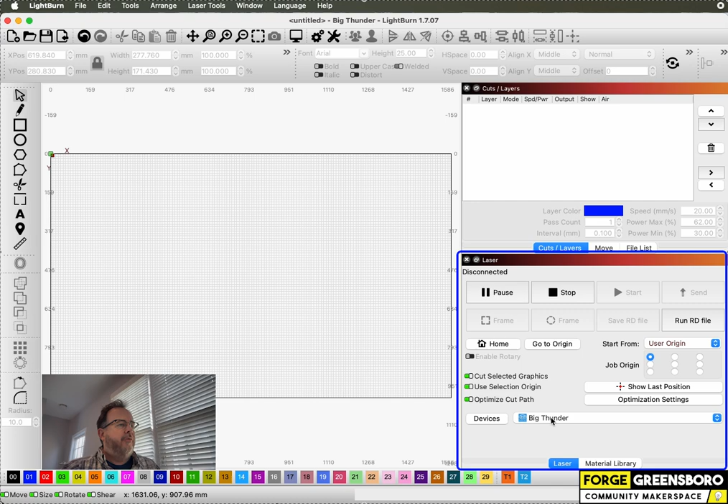Then below that is the laser window. This is where you can send files to the laser. You can set your job origin, tell it how to handle the things that are being sent to the laser, and control which device you are using. Again, there are some tabs that are underneath here. You might have more than just these two. And if you do, don't worry about them for now.

Sometimes people might have accidentally done something like this. Let's see, can I get this to happen? Yeah. So they've got the cuts and layers separated somehow, and they might have moved it down here. You might have things in weird places. If you ever find that, you can always just come back up to the Window drop-down and hit Reset to Default Layout, and then everything should be back where it should be.

So in the software here, we are going to be importing a pixel-based image of the Forge's logo. Then we are going to be drawing an ellipse around it and a circle next to it. It's going to be basically a Forge branded little keychain fob.

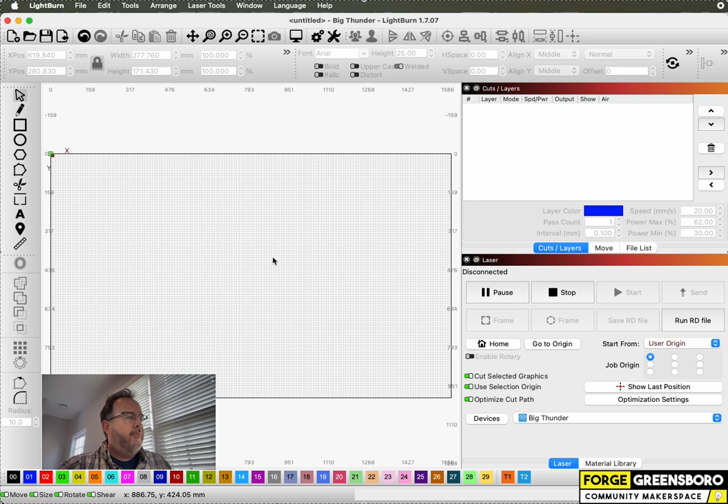So first thing I'm going to do is bring in the image. You can drag and drop it if you want, but right now I'm going to say File, Import. I've got a couple of different Forge logo files here. One's a PNG, one's a JPEG. They will both work just fine. I will bring in the PNG.

Why not? Oh, except one thing that I forgot to do is down here under Devices, I am controlling Big Thunder. Big Thunder is not the laser you're going to be learning to use today. Instead, we are going to be using BlueJ.

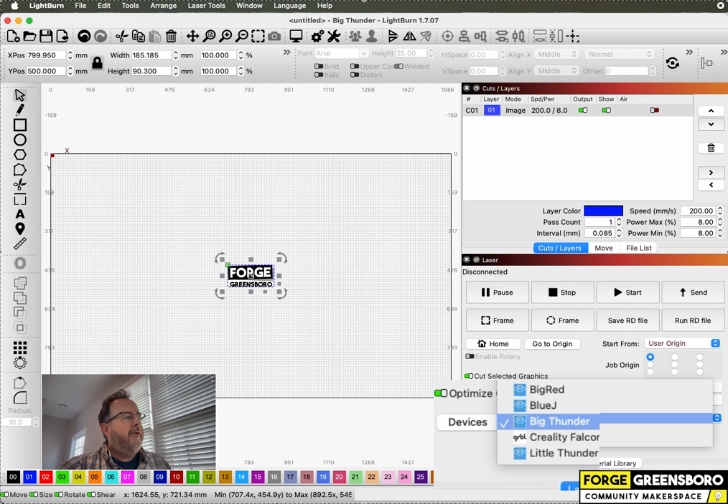It takes a moment because I'm actually recording this from home, not at the Forge. So it's trying to communicate with BlueJ, and it's not being able to communicate. So eventually, it will give up. You'll notice that down below, I have this thing that says no device found.

And you'll also notice this re-rendered over here. The reason for that is that this represents the whole bed of the laser that you're working with. Since Big Thunder is larger, it had a smaller, finer grid on here to represent the further out view you were having to take of the bed. Now, BlueJ is smaller, so we're essentially able to get a little bit more resolution on that.

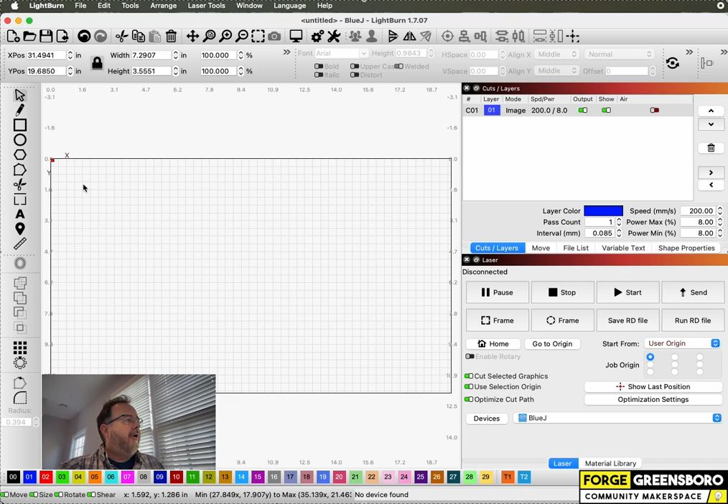Now, where did my Forge logo go? Well, I'm going to zoom out, and you'll see it's way down here. That's because it was placed in the center of Big Thunder's bed, which is way outside the scope of BlueJ's bed. So I'm going to bring this up here. One reason why it's really important to choose the device before you get too far into your job is that different lasers have different home corners.

So at least 2 of our lasers have their home corner at the back left, and at least 2 have their home corner at the back right. So if you are changing from one laser that has one home corner to another laser that has a different home corner, things are going to flip as a mirror image.

But if you also have some text in there—we're not going into text in this video—sometimes that doesn't flip right and it can be kind of a pain. So it's usually a good idea to make sure you get your device chosen before you start importing images or drawing graphics. Right now, this is over 7 inches by about 3.5 inches.

So that is way too big for a keychain fob, unless you are working for a gas station on the interstate where people keep borrowing the bathroom key and you want to make sure they don't walk off with it. In that case, you might want a 7 by 3.5 inch keychain fob. I'm not going to be doing that today.

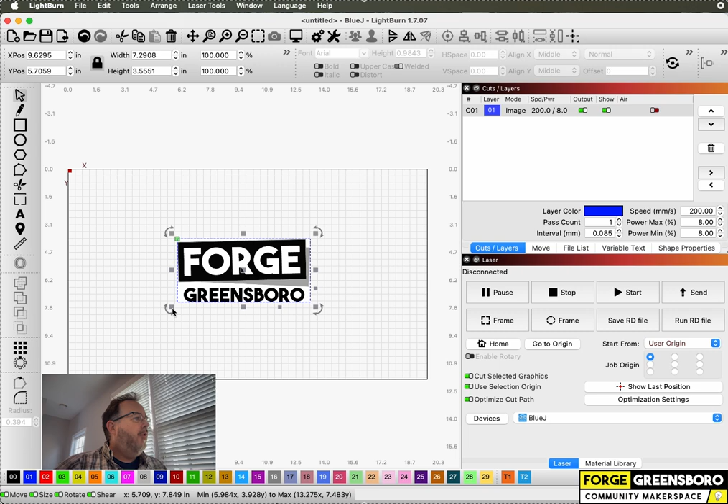So I want to resize this. There are numerous ways we could do that. If you mouse over one of these corner control squares and hold your mouse button down, it will allow you to zoom this thing in or out. Let me zoom in here a little bit.

Notice that if I come out here over the little round arrows, it gives me a little round arrow when I mouse over it, saying that if I held my mouse button down and did something, it would rotate the thing, which is not what I want.

I'm going to undo. If you mouse over these little corner handles, it's supposed to give you a diagonal arrow instead of your cursor, but it doesn't seem to be doing it right now on mine. You should get a little diagonal arrow pointing this direction or that, and when you get that, you'll know you can resize this.

You'll notice it will not change the proportions as I do this. If I hold down my Shift key, it will allow me to change those proportions. That's the opposite of how these things work in some software, and actually the opposite of how it works in some other contexts here. So I can bring this in this way to make it smaller.

I can also do that with the width and height inputs over here. You'll notice this padlock is currently locked, which means that if I change my width or height numerically, the other one will change proportionally. So if I set this to, say, 2 inches wide, it then changes the height to just under 1 inch.

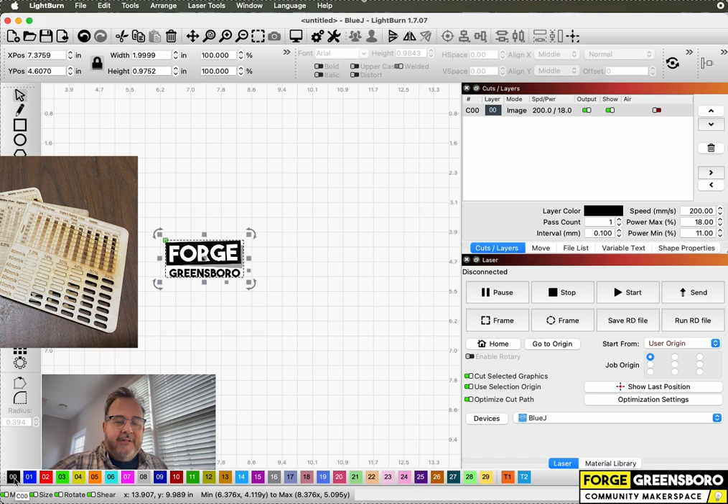You're not going to use all 30 in most cases, unless you're creating one of those test cards I have sitting around the shop. Usually you're going to use no more than 1 to maybe 5 of them, usually more like 1 or 2. So I am going to set this to layer 00.

You'll see layer 00 has a speed and power associated with it. That speed and power was set by the previous person to use this layer for an image on this computer, so your numbers may be looking very different here as you go through this.

I'm then going to deselect my shape. I did that by selecting my selection tool and clicking outside here somewhere. Zoom in a little bit more. I'm then going to choose my 01 layer and draw my circles and ovals on that layer. So, selected 01, I have my ellipse tool selected, and then I'm going to draw out an oval.

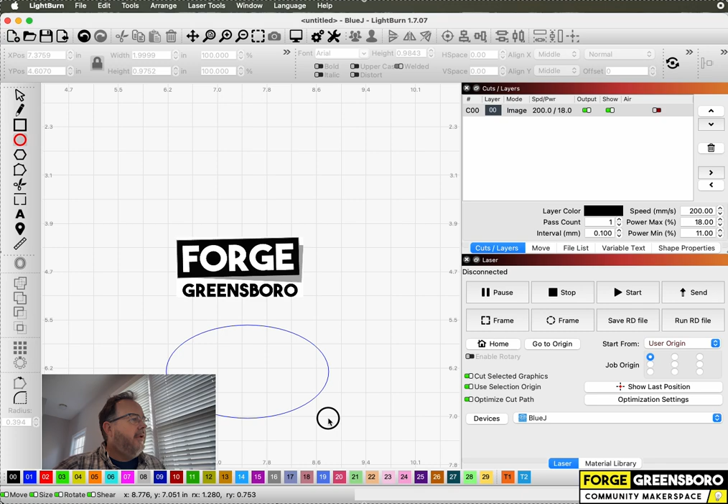Okay, I'm going to grab my selection tool. When you mouse over the center of either your image or your oval graphic here, you should get a little 4-directional arrow that shows up. But if I grab this by that center control handle, you'll notice that just moves the shape around. Because of the snap settings we have here, you'll notice this wants to snap to the center of that. I could also select everything and use this align both vertical and horizontal centers tool.

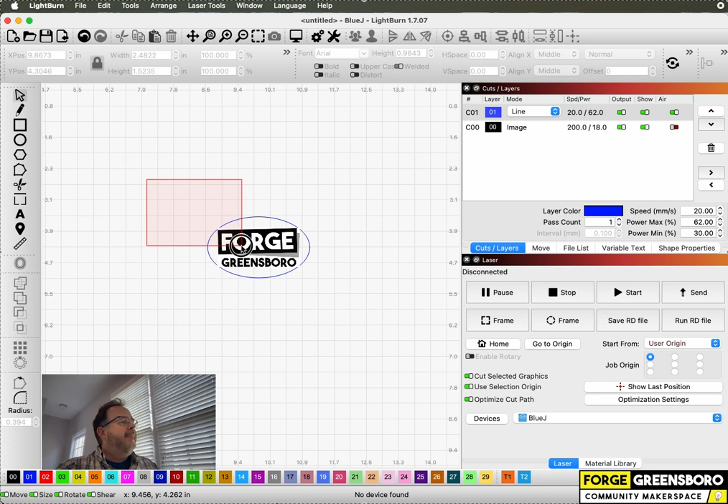When I selected these things, you'll notice, as long as you don't have red-green color blindness, which more people do than folks realize, if I drag right to left, this thing turns green. If I bring it to just right here, where it's just overlapping the corners of those two shapes, it still selects everything. If I go left to right, you'll see that this box is red. If I come right over the corner of these things, nothing is selected. But if I surround them entirely, they are selected.

This can be useful if you've got a design with a lot of little parts arranged on your bed, and you need to more easily select these but not those. This difference can be helpful. The mnemonic device I use for this is: green is greedy. So this oval looks a little small for what I want it to do here.

I'm going to unlock the width and height proportions, since they don't really need to be proportional to each other necessarily. I'm going to make this 2.75 inches, let's say. Oops, be better if I could type 7.5. There we are. And maybe 1.75 inches tall. That looks good to me.

Then I'm going to grab my ellipse tool again, so now I'm going to draw the little keychain hole that the ring will go through. I'm going to hold down my shift key this time while I draw out a circle. If I hold down shift, you'll notice it will not do an oval, it will only do a circle. If I release shift, it allows you to get an oval. Hold down shift again - and that is somewhat different from what it does for an image, so I just wanted to point that out to you.

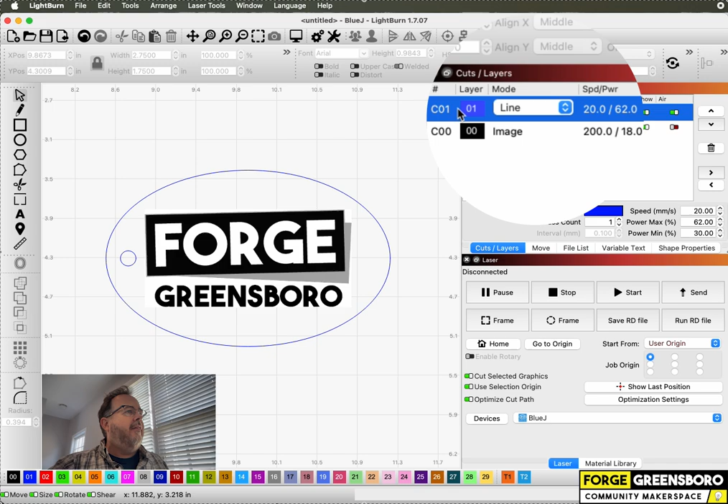And you want to make sure that everything that's supposed to be on that shape or inside that shape is engraved or cut first so that it will still be in focus and in the right location. So right now, my line layer is set to be executed before my image layer. So I'm going to select that image layer and hit this little up button on the right, and that will move it into position.

So here in the Cuts Layers window, we've got the name of the layer. Now that is set by users, and since you're working on a public computer, you have no idea what the maniac before you is doing. So ignore whatever it says here in this first column, if it says like 'cut 3mm Baltic birch' or something - somebody named it that at one point, and it doesn't necessarily have those settings set on it anymore. By default, it would say C00, C01, C02, etc.

The actual layer number is listed right here along with its color. What is the image mode? For pixel-based images, it's just image—there's nothing else you can do with it. For vector layers, you can have line, fill, or much more rarely, offset fill. Usually it's one of these two.

We are using a line. Then it has what speed and power has been set for that particular layer.

We then have output—that is, is this set of instructions going to actually be sent to the laser? There are situations where you don't want it to be. We're not going to be going into any of those today.

Show is just, can I see it over here? People usually don't turn that off, but if they have, pay attention.

And then air, that only is relevant for the Thunder lasers that we have at the moment. That might change with other lasers we get or whatnot, but you can ignore those for now.

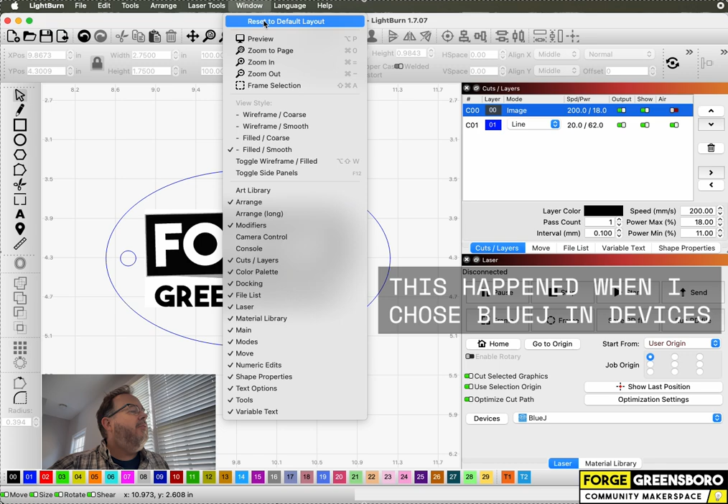Apparently I've got more tabs showing up down here. Let me go back and reset to default layout. There we are. Okay, let's double click on our image layer here.

I'm just going to double click on this little black chip that says 00, and it opens up our cut settings editor.

So I had already set this up before we got in here to a speed of 200 and a max power of 18, which is probably not bad settings for an image layer, although we've got those little test cards that are usually around the department that will give you an idea of what speed and power combinations will do.

Minimum power for an image layer is really irrelevant. I actually kind of wish they would disable that for image layers, but they didn't. Essentially, minimum power is what it does when the laser can't move the speed you told it to move. And for an image, all of the area where it's moving too slowly is going to be outside of the image. We don't need to go into that more than that.

Settings you need to make sure you check, because you're at a public computer, and again, you have no idea what the person before you was doing.

We've got negative image. That's one that people will sometimes turn on if they are engraving a photographic type image on stone or glass or acrylic, because in those cases, where the laser hits, it turns it frosty rather than turning it dark and burnt. So if you are trying to engrave photographic type images, you don't want it to look all ghostly and weird, and so you would turn it to negative. The person before you may have turned it to negative and you might not be expecting that. Always check that.

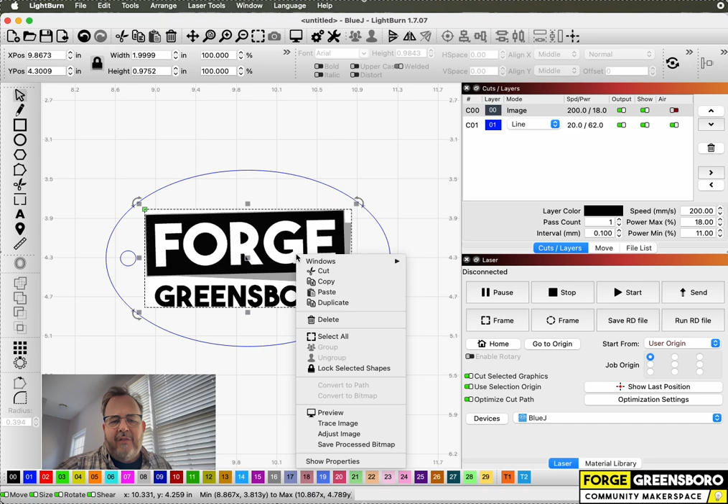All right, I'm going to close this. If I want to modify how this image is handled, I can go back and forth between the cut settings editor and the preview button, but there's a more direct way. If you left click your image and then right click it, oddly enough, in certain situations in this software, simply right clicking doesn't do it—you have to left click, then right click. It's a little weird. So I'm going to come down to adjust image, and get this adjust image window.

You can see down in the bottom left area we have layer settings, and image mode is set to threshold, as we saw earlier. I'm going to resize this so we can see it better.

So for image mode, threshold is what it's currently set to, and you see what it's going to do. I'm going to run you through these very quickly—I'll probably do another video later that goes into these in more detail. Ordered will give you grayscale, but it will look like a 1990 Macintosh. I have memories of playing Risk on a friend's 1990 Macintosh my freshman year of college.

Atkinson will have a scatter of pixels—they're scattered around a little more randomly. Atkinson is a little bit more high contrast than the next three, which are all very similar. We've got Dither, which is generally considered the industry standard. You can come down and do Stucki, which is very similar, and Jarvis, which is very similar. Dither, Stucki, and Jarvis basically do the same thing, just using different algorithms.

In all of them, they scatter single pixels of all the same size at different distances from each other to create different levels of black, white, and gray. Newsprint and halftone instead have a scattering of pixels that are the same distance from each other, but they are larger or smaller.

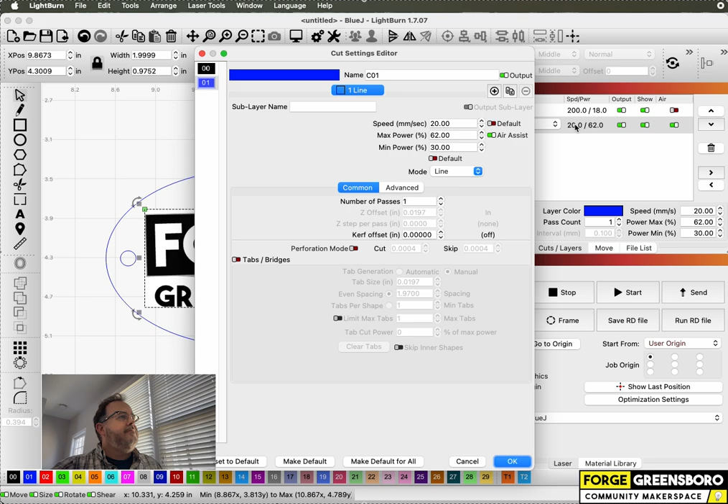For the line, I'm going to double click it in the cuts and layers window. Right here I have a speed and a max power set to good values for BlueJ here, so we'll be moving the laser head when it's cutting at 20 millimeters per second. You can use line layers to just score things, just go ahead and draw things. The speed and power you use determines whether it's going to be cutting or drawing—this is a good cutting speed.

62% power is the max we're allowed to use on BlueJ. This gives you the maximum amount of power you can safely get from the tube, but the power supply can supply more power than the tube can take. So we're saying, hey power supply, give me 62% of your power, which is the most the laser can take. There should be some controls that keep you from going over max power, but we're asking to go at 62 and not higher. If you go from 62 to 75 to 80 to 90, you're getting no difference. It should still be 62.

The minimum power I'm setting to 30. Minimum power is what happens when the laser can't move the speed that you told it to move while firing. So if you have sharp corners or very tight curves, it probably won't be able to get above a certain minimum speed as it navigates those things.

Our mode is set to line. Fill and offset fill are your two others. Usually line and fill are the only ones we use, but if you're cutting or drawing, you want to use line. Down below, in terms of settings some people set that you may not be expecting, there's number of passes.

Usually I like to go one pass and just go high enough power and slow enough speed to do my cut on one pass. Some people prefer going a lower power at maybe a faster speed and running it multiple times, so someone may have number of passes turned on higher.

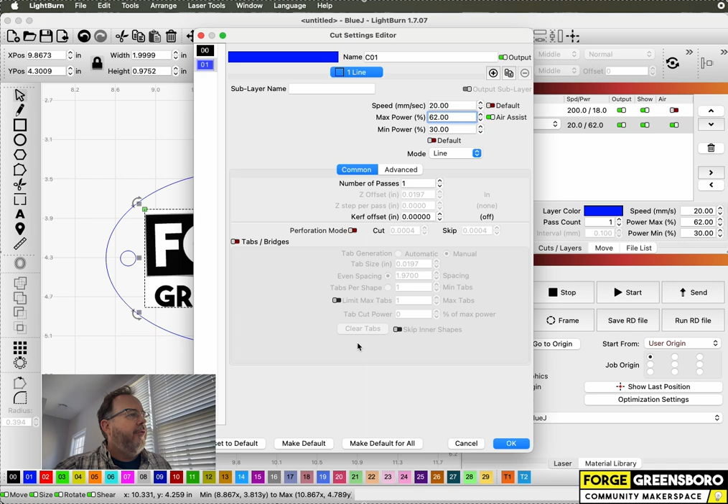Down below, we've got a perforation mode and tabs and bridges. Just make sure those are off unless you're using them for a particular reason, but this being a beginning course, we're not going into those right now. All right, I'll click OK.

We then want to look at our job origin. Right now my job origin is set to top left. Remember, when this is down on the bed, top means back, so this is the back left corner of the machine. If I select all of my things to send to the laser, you'll notice I get a little green square at the top left corner of the bounding box of my job. That's because this is here.

If I choose a different corner or the center - in this case it's hard to see in the center because of the handle that's there - but whatever we've chosen is set to the job origin. When you get to the machine itself, you can tell it where the laser head is, move it to the right place, and set that as your job origin. So whatever job origin you set on the machine is equivalent to the job origin you set here in the software.

So right now, if I send this to the machine, wherever the origin point has been set for the laser head, the job will be done to the right and to the front of that spot. So make sure you've paid attention to your job origin.

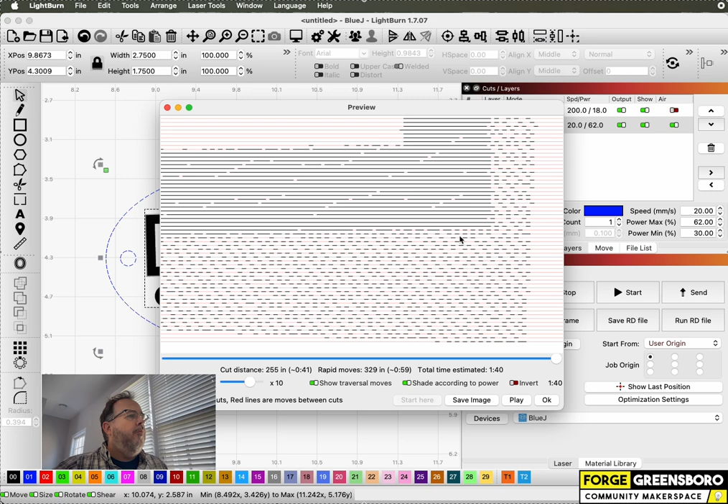I said that minimum power is irrelevant for images. That's because any slowing down and speeding up happens out here in this pink area outside of the black lasered area. If you zoom in here, you can see it shows you literally where the laser is turning on and where the laser is turning off. So here's a pass - it's going on, off, etc.

Reading this and figuring out what it's actually going to give you can be a little tricky, and even I can still get it wrong a little bit, but it gives you at least an idea of what it's doing. Sometimes this might be set to invert. If the person before you has been working with glass, stone, or acrylic, they might have hit invert to see what it will actually look like. We do not want that on right now. So I'm going to hit play.

You'll notice I have a playback speed set at 10 times. I'm going to hit play, and it's going to show me a 10 times speed animation of this. You'll notice the job will take 1 minute, 40 seconds. And you should have seen that all of the image in the middle here is going to finish being engraved before it then does this keychain hole, before it then cuts the outside part out.

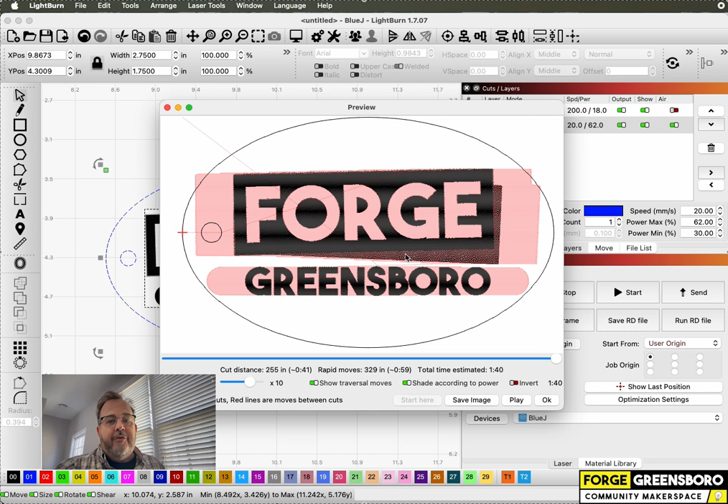It's always a good idea to run a preview before you send this stuff, because you will see things show up that you didn't think were going to show up, and that alerts you to a problem before you send it to the laser, rather than having it give you problems or waste some material. So I'm going to click OK. And I've pretty much done everything.

So to review, we imported our pixel-based image, resized it as we wanted it. We set its speed and power the way that we wanted, and we changed its image mode to handle the grays and things like that the way we wanted it to.

We then drew our ellipse and our keychain hole circle, assigned those to a layer, told that to be a line rather than a fill, gave it a speed and power that's appropriate for cutting. Check to make sure output is on for both of these, which we do want in this case.

Then, down below, we have set our job origin. Cut selected graphics and use selection origin is on, which is how things are usually set at the Forge. Optimize cut path is on. Leave this on and do not click optimization settings. Those are set the way we want them to.

The way they're currently set makes sure that this inner circle is cut before the outer oval. We don't want to mess with that. You don't want to be the one who messed with it and then makes other people have jobs that don't turn out right. And before all of that, we made sure that the correct laser was chosen, BlueJ in this case. So at that point, we can go ahead and hit send.

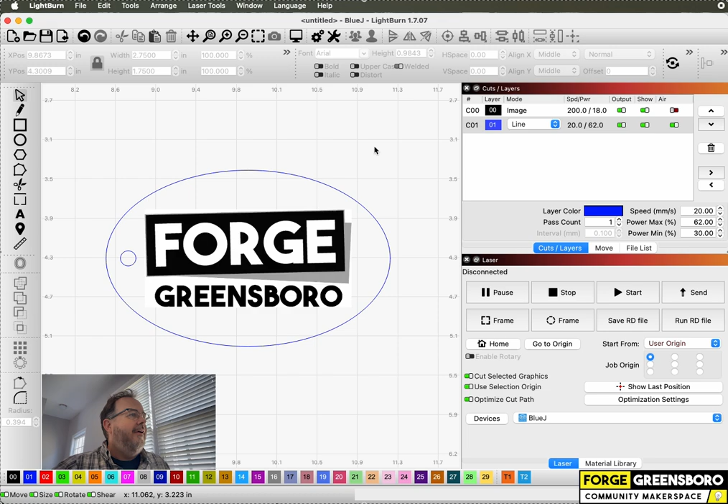Now, as I said, I'm at home, not at the Forge. So when I hit send, it's going to look for the laser for about 5 seconds. First it says I have not selected anything and I have cut selected graphics on. So I'm going to select things. Then I'm going to hit send.

You know, in the software instruction business, we say that we never make mistakes. We only create teaching opportunities. So this now gives us this more expected error: there was a problem sending data to the laser, the machine may be busy or paused. I'm going to click OK. You'll notice down at the bottom it says file upload failed.

Now, if you are at the Forge and you're pretty sure you are on the network, one way to deal with this would be to right-click on this Devices button. It then searches the network again, and hopefully it'll find that laser, unless the Ethernet's been unplugged or there are certain other issues. It could be that the previous job had been paused but not canceled - that's another thing that can happen. If none of those things apply, then when you right-click this, it should then say found and the model number of the controller. That is one way you can troubleshoot.

So at that point, I have theoretically sent this to my laser, and then the video where I show the operation of BlueJ is the next step in what you're going to do.